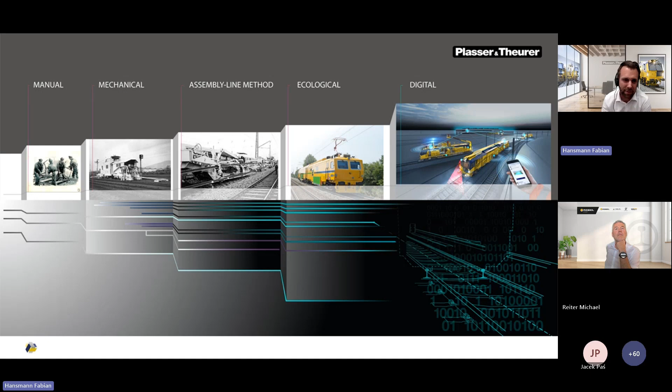What we can see is that we currently have an increasing challenge with the lack of skilled people. This is not really an isolated problem - it's not a problem isolated to one single country. This is a problem we have across the whole railway industry, not only focused on railways, but also for us as manufacturing companies and for planning companies. We can see that the lack of skilled people will have a tremendous impact on how we maintain and operate railway tracks.

This is an example from England, where we can see that only 5% of the workforce will be under 25. The German Federal Railways identified the lack of skilled people as one of the core risks for the business. And the APTA, the Association for Public Transit in the United States, goes even a step further and says that the shortage of skilled people already has a significant effect on their services.

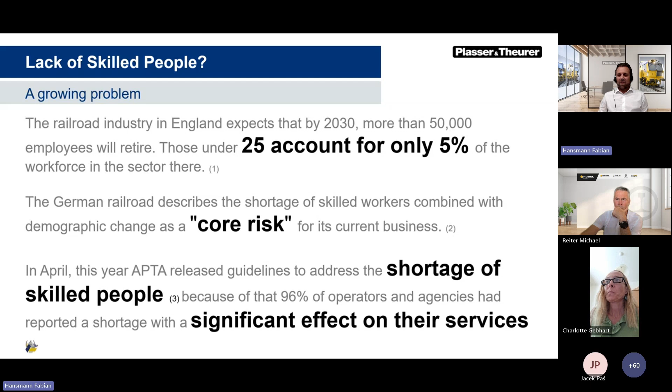So the lack of skilled people is already a big issue as a standalone problem and will raise the challenges that we have. But this issue combined with increasing demand for more capacity on existing infrastructure, running more trains on existing infrastructure, is really a terrible combination because we want more trains running with fewer people. And this really opens the doors for introducing digitalization into the system.

This is nothing new for the system, that is what I have to say. The railway system has used digital tools from the beginning, like for signaling or also for controlling and monitoring maintenance of way equipment.

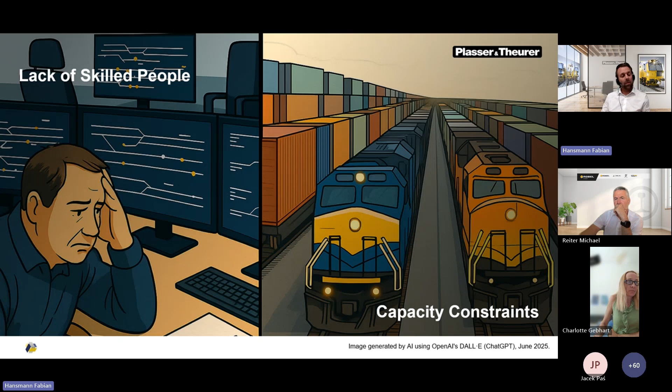But it is a challenge. For instance, the Austrian Federal Railway clearly states that they want to double their capacity by 2040. So we have to run more trains on the existing infrastructure with less people. That is exactly where we see potential for maintenance of way equipment to support or help the system achieve this goal.

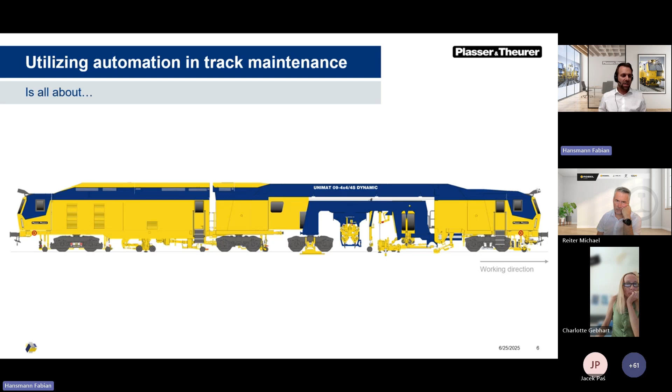And of course, if we now want to talk about how we can automate track maintenance, everybody would assume we have to talk about big yellow machines. But we want to take a different approach here, because one thing is clear: you can only get high performance out of a high performance machine if a lot of different aspects are working together.

So we have to switch a little bit to an end-to-end process when it comes to track maintenance - not only focusing on the track maintenance machine, but on a process that combines pre-measurement, work preparation, execution, and documentation. That is a really important aspect here.

Giving you an example: a high-performance tamping machine will not be able to achieve high performance results or high quality if it does not have the surveying information from a pre-measurement run. A high-performance tamping machine cannot achieve high performance if there is not sufficient ballast loaded, located, or stored in the position where we have to maintain the track.

What I wanted to say here is that when we talk about track construction or track maintenance, it's not only about the big yellow machines. There are so many different aspects that we have to consider, and we can only optimize the efficiency of track maintenance if we optimize the process itself.

So let us start with the pre-measurement. When we talk about pre-measurement, we talk about condition monitoring. That is nothing really new for railways all over the world - they are using measurement signals or devices on measurement platforms or recording cars, like here, the EM100 VT.

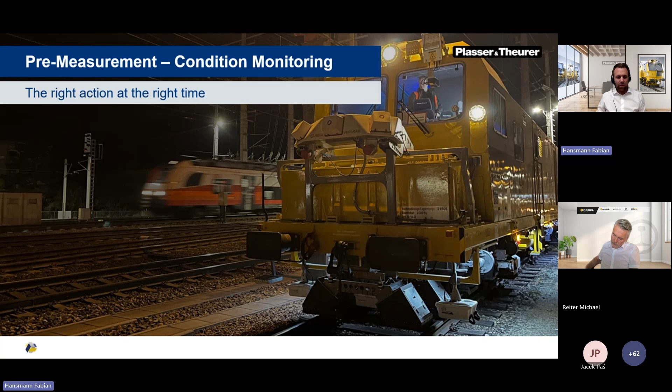So the question is, how can we actually make the data smarter? How can we use the existing information in a better way to get more out of it? That is really crucial, because usually we use recording cars that detect or measure different signals - we store them, observe them, analyze them. But the issue is, if we have a lack of skilled people, we have to go a step further.

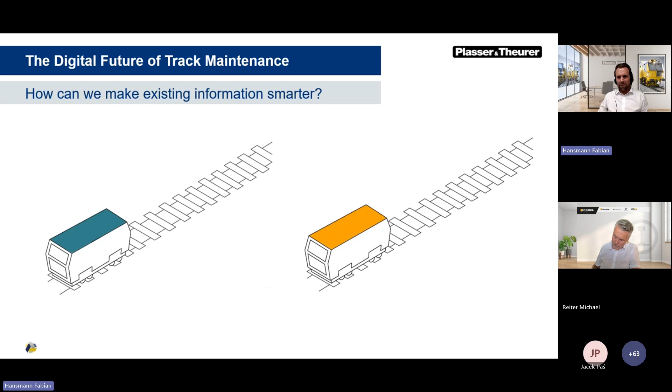So we have to actually use the same recording car, analyze the data - but analyzing the data is not the last step. We have to create information out of the data. So making information smarter means, for me, transforming data into information, and then information into knowledge.

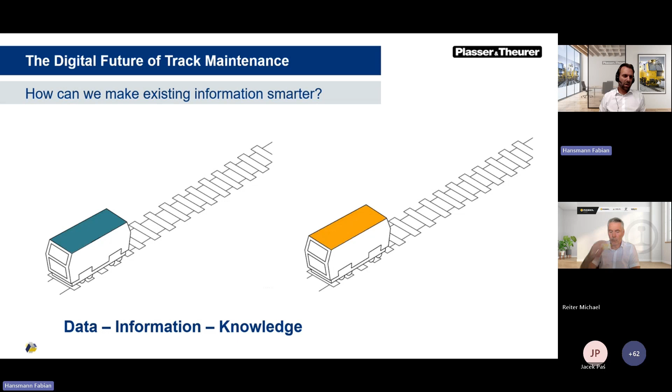That is exactly what we need when we consider that we have a lack of skilled people, because only if we can create maintenance actions directly out of the data will it make planning easier, also for less experienced operators. Then, in the final step, we have to connect the different information providers with the executors - connect the recording cars with the tamping machines, with the ballast plows, with the regulators, so to say.

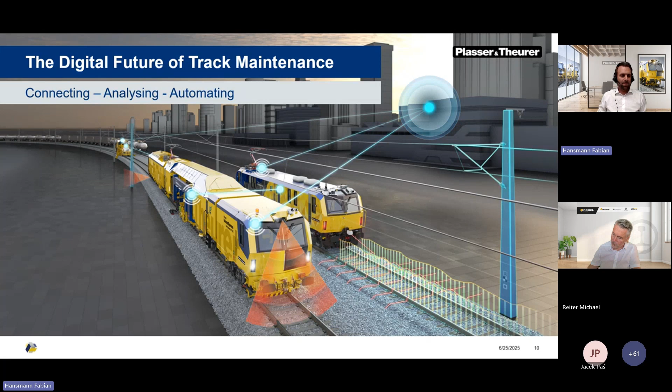So the future of track maintenance, the future of pre-measurement, is not only to transform data into information and information into knowledge. It's also about sharing this knowledge with the different stakeholders of the system - with the tamping machine operators directly, not with a flash drive, not with a USB stick. It's more about connecting different machines to each other to optimize the interaction between the different maintenance of way equipment.

So once we have identified the location where we want to do some maintenance action, we have to work on the work preparation - we have to unload ballast, identify what components are worn out, what we have to do. How do we do that currently? We still walk the tracks from time to time to identify what we should do.

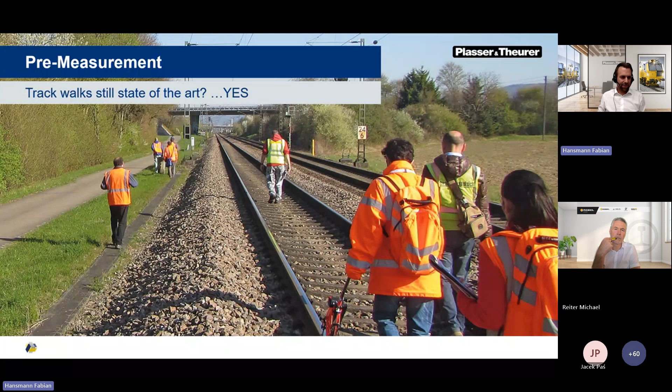And the question is, can we use the different information from different measurement signals by combining and connecting them, creating a digital twin? And the answer is yes, we can.

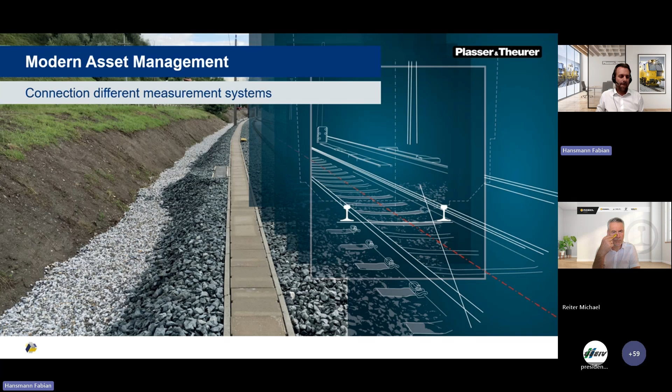I want to give you an example from Germany, where we had a renewal project between Hanover and Würzburg, over 523 track kilometers. There's a regulation that we have to walk the track, or at least analyze the track condition before a renewal action. In that specific case, walking the track would last almost 60 days.

This is absolutely impossible in a time where we have a lack of skilled people, but also a lack of capacity, where we want to increase capacity, to put it differently. So we can, of course, use a digital twin.

That is exactly what we did, in collaboration with our project partners. We were able to reduce the 60 days of track inspection down to 10% of the track possession, running a modern recording car over the track, combining all the different measurement signals into a so-called digital twin, which can now be analyzed in the office in a much friendlier, more work-friendly environment, but also in a safer working environment. That is the second very important aspect here.

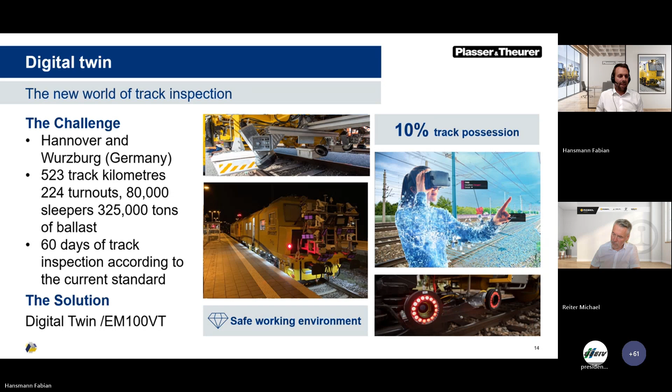We can run a recording car at 120 or 100 kilometers per hour, combine the information, and then analyze it in the office, where we can work with experts, but also with operators who are probably not so experienced. So once we have identified where we want to do a work execution, and how we want to do it, the question is: what do I need to do?

Now the question is, we have to execute the work. I want to show an example of how such a work execution can work in a more optimized way.

I want to give you an example for really system-critical components, like a crossing. A crossing is really critical for a railway. It's not only about changing from one line to another, but any failure in a crossing would have a drastic impact on the whole system.

So the question is, looking at such a universal tamping machine, can we support that machine, or can we train a track maintenance machine so it's doing the work on its own, or at least monitored by not 3 operators anymore, but just 1 operator?

That was the goal of a research project we started almost 10 years ago, looking into how we can start a journey towards a fully automated tamping machine. The main goal was to reduce the head count on the machine, tackling the challenge that sometimes we don't have the required crews to operate tamping machines. So it's not so much about a lack of tamping machines in the market, it's more a lack of operators to actually operate them properly.

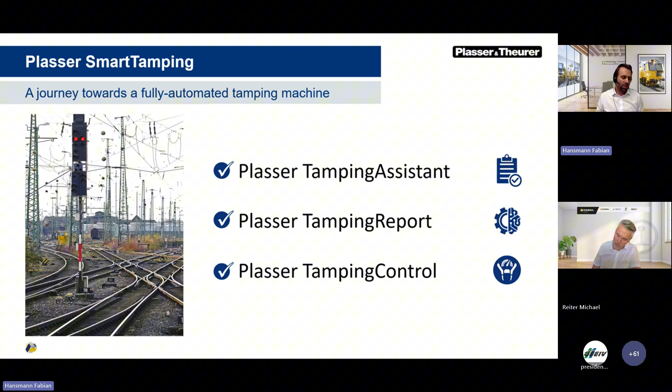So the main goal was, how can we help beginners, inexperienced operators, with operating such a machine, but also how can we reduce the head count on such machines? So we are using more or less the tools we also saw during the creation of the digital twin, during the pre-measurement runs, to record the data.

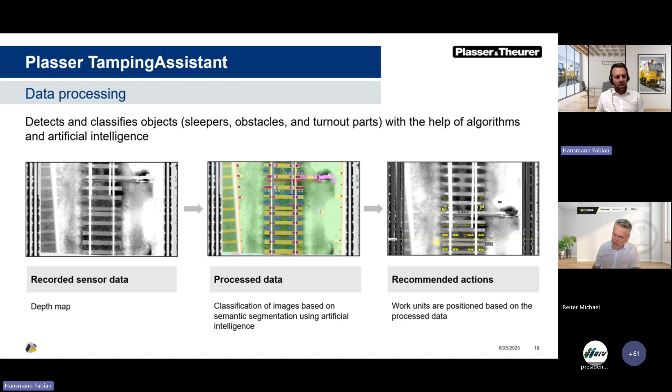We more or less built a digital twin on the tamping machine. We process the data, and based on the identification of the different components, the segmentation of the data, we identify or recommend certain actions to the operators. So, how it works...

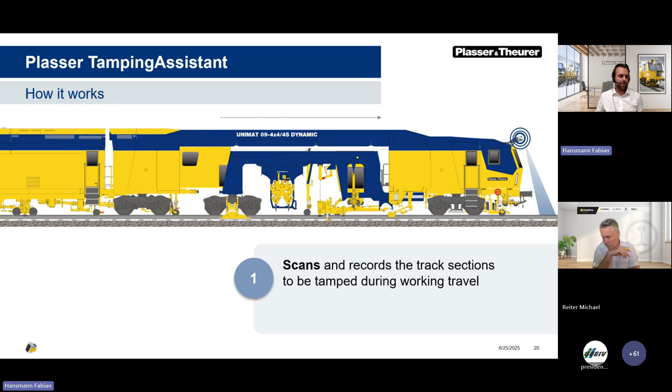So in front of the machine, we have different measurement devices that scan and record the track sections that should be tamped. After the scanning, the onboard computer classifies the obstacles. The computer does that on its own based on up to a 6-month learning curve. So the computer segments the different pictures and identifies, okay, this is a tie, this is a sleeper, this is a cable, and so on. It identifies the different components that usually appear during a turnout.

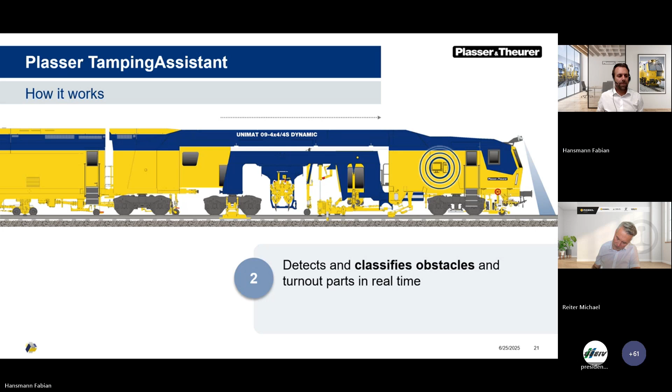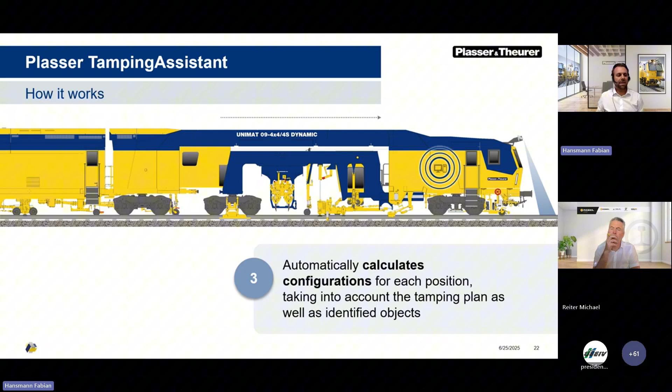And based on the classification of the different obstacles, the computer automatically calculates the configuration of the different working tools. So it identifies the obstacles, it identifies the ballast pad, it identifies different components, and then calculates based on that and existing tamping plans, more or less regulation, how a turnout should be tamped. It clearly gives a proposal to the operator and automatically positions the different working units.

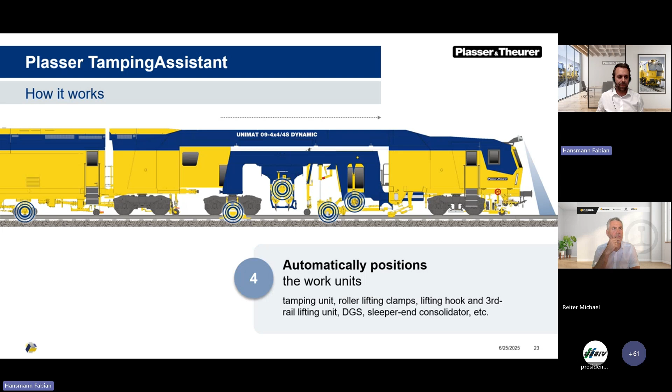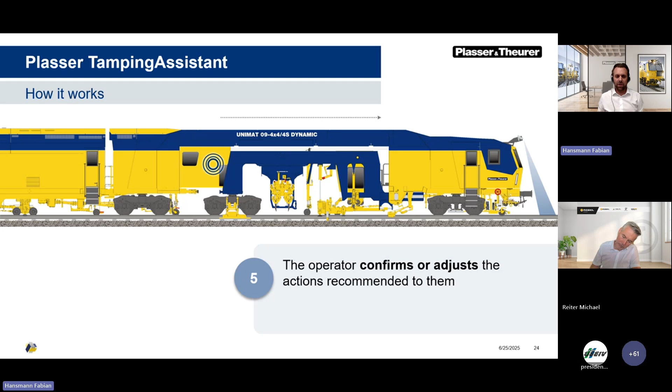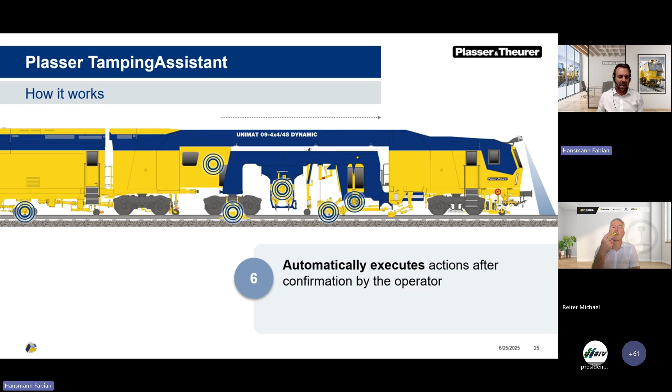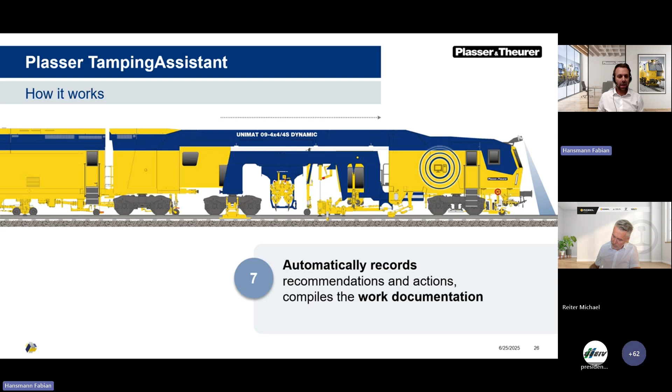So the assistance system identifies the obstacles and then positions the different working units completely automatically on its own. After that, the operator just has to confirm or adjust, depending a little on the situation. Then the working machine automatically executes the different actions, based more or less on the confirmation by the operator. This is still necessary simply based on the regulations of the current railroads. And then in the end, we automatically record the work quality and do the work documentation.

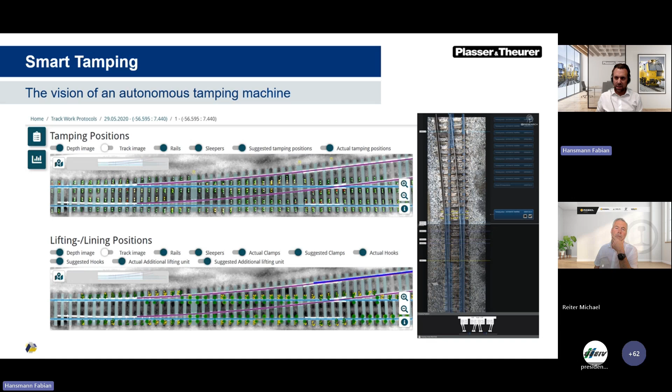It also combines the different information from all the different sensors. It gives you information regarding the ballast condition, information about the lifting values, information for each sleeper - how have you tamped, what quality have you achieved. So it really offers you a transparent documentation of the work you have done so far.

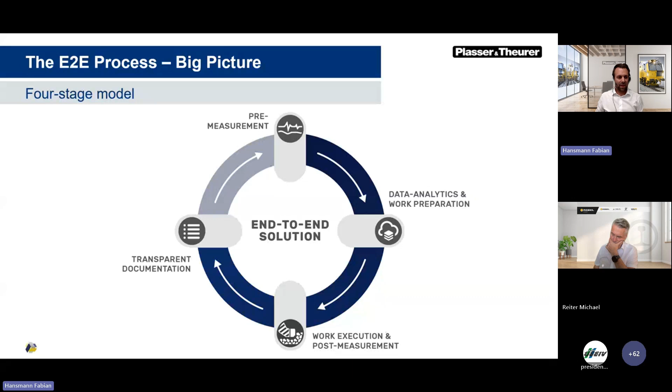And now you can actually combine all the different tools into one tamping machine. Of course, if you do that, you can only measure, for instance, track geometry. So you cannot cover the full range of a track recording car, but aiming on track geometry, you can cover almost everything regarding the track geometry pre-measurement, even on a geodetic surveying level, from the pre-measurement to the documentation, and also the execution for sure.

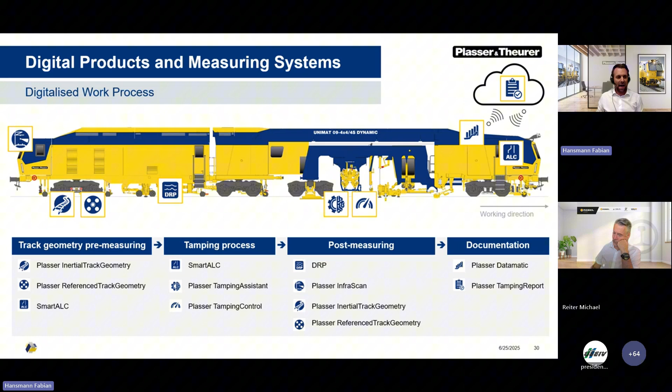So what is really important, what we want you to take away from this presentation: when we talk about challenges, when we talk about higher efficiency in the railway industry, we should not only look at one single machine. We should not only look at one single segment in this end-to-end process. We do not automate only one part of the process - we enhance every movement along the way, because only if each part of the process fits together can we increase the efficiency of track maintenance.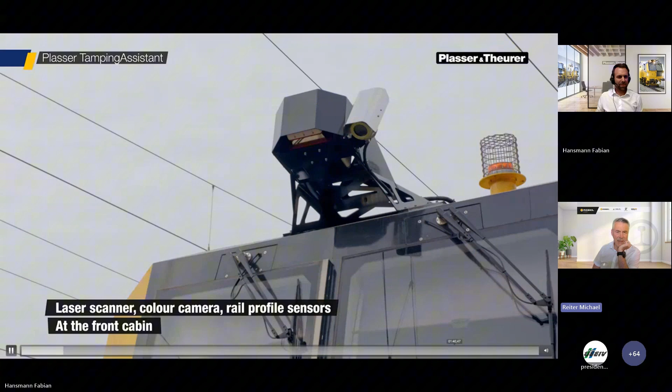With that being said, I will come to the end of my presentation. I would try to show a video, but based on the connection issues that we had, I will just try to show it. Michael, Bobby, you can give me feedback if it runs well. If not, I will stop it and hand over back to the chair. Let me see if it starts in a proper way. Is it working, Michael? It's a bit - let's wait a second. Oh, it's stopping, it's stopping.

Okay, so I'll skip it because I have explained almost everything already in the presentation. It would just be a nice video showing everybody that this is not just an idea - it's a little bit more than an idea, it's reality already. With that being said, I give back to the chair. Thank you.

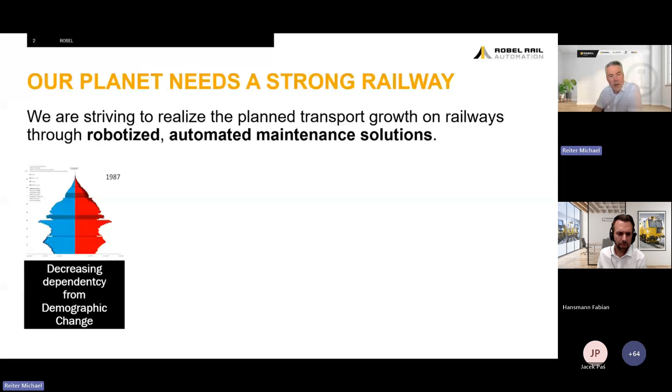So again, also one slide from the feedback that we received so far from our customers and partners. Why are they so interested in having a reliable transport and getting more trains on track? It's really that they need the help of robotization and automated solutions at the end of the day because of the lack of people. And with these solutions, we can contribute to decreasing dependencies on the demographic change. That is really one core topic of all what we are doing and what is driving us.

Another one that is very important to us is the short maintenance windows that we see everywhere. It was 8 hours, it is 4 hours, and as the density of traffic increases, we will see more urban contexts like 2-hour maintenance windows where the job has to be done. And this is already the physical border of work that can be done and achieved in the right quality in 2 hours.

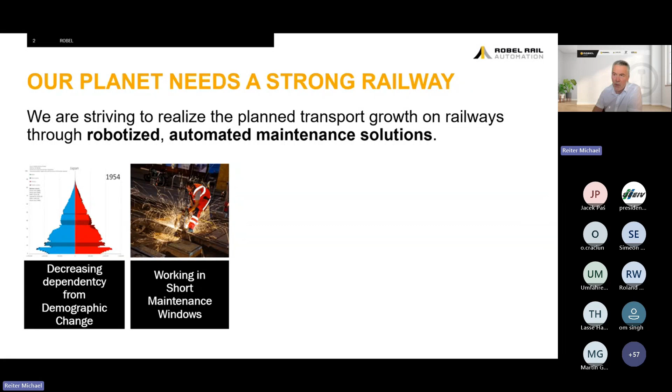Another point mentioned today already was improving the safety of people out on track. So reducing people in the ballast is one paradigm that we'd really like to follow. And also, to have repeatable work done, specifically when it comes to welding, we want to really have this consistent, repeatable process there.

And yes, sure, I think it's not even worth mentioning, but reducing emissions on all sides is demanded by regulations, by laws, and we have to come up with smart solutions that allow us to work reliably on emission-reduced systems. And last but not least, it was mentioned also today that digital integration is key.

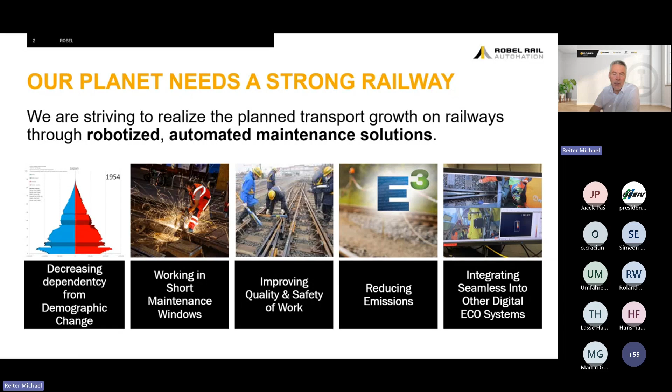So if automation goes hand in hand with digital integration, then I think the value is there. We know what to do, we have the evidence, we do the job, we document it, and at the end of the day it's also a digital twin of the work that we do, not only the track but also the work. And I think that adds value again for all the users. And if it's shared smartly between the infrastructure provider, the construction companies, and the industry, that knowledge will be the benefit of all passengers and all goods transported.

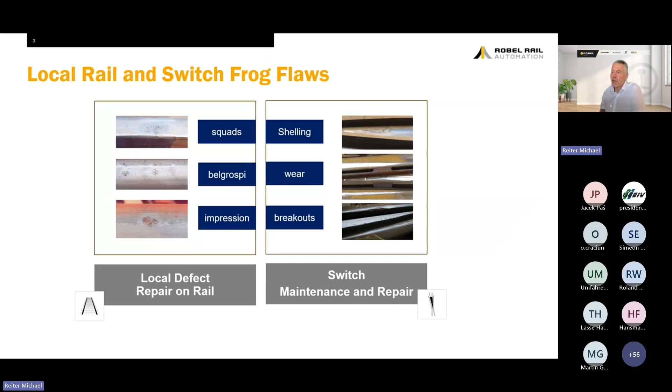Okay, so let's focus a bit more on the technical side. Today I want to talk about two things that we actually automate: the repair of local defects on rail, and the maintenance of switches. And this goes in a sequence, I have to say. Three years ago at the IAF, we first introduced the local defect repair, robotized and fully automated. And the feedback we received was, hey guys, that's nice, but the most critical infrastructure component is the switch. So if you can do the switch, that would be a big benefit. And I want to talk about the two things that we have done here.

If we are talking about automation, also on the tamping unit that we have seen Fabian tackle that point, it's always considered as the end-to-end process. So our vision is: with the press of a button, the machine, in the right position on track, performs the full job, and there is no interaction, no control mechanism from an operator needed. It's more observing and helping with the operational and logistic side of the machine, but not infringing on the process, because this is carried out automatically, always in the same way.

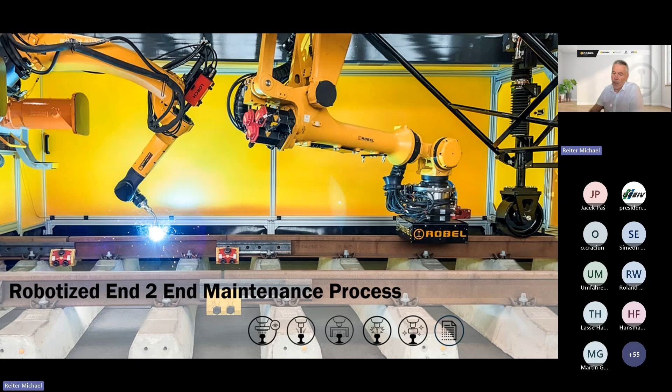Four years ago, we built a technology carrier. We named it, and it turned out that now it's much more than just a technology carrier. Right now it's a machine used to drive homologation efforts on the rail infrastructure, and it's really applied to provide the first services. But I'll come to that a bit later.

In total, the concept we are focusing on is really to have a machine that enables us to focus on process development, to have a really stable maintenance process, and we neglect the machine itself a bit. So we decided to just use what's there: a flat wagon, put containers on top of it, fill the containers with stuff. One is filled with the automation aspect, with the robots. The other is filled with the energy supply and also an operator workspace. And then we have a robot frame that is carried out and does the job and performs the work.

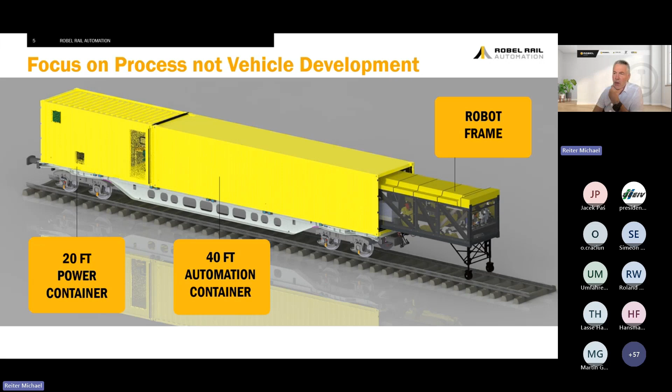So a very simple aspect. Maybe I have to share this thought again. As we are a relatively small company, we have to focus on the core. We just have to do what adds value to our customers. This is why we are not focusing on the machine too much, but on the real world processes that do the maintenance job, and also the software and digital integration. This is our core. We're not inventing stuff, we're reusing stuff.

And this is why we have decided to go with robots. This is, I have to say, one of the most proven technologies you can find today. It's been applied for 20 years in the car industry. They run the full year, 24 hours a day, and therefore this is really a technology with less maintenance and is that reliable and flexible to work with. It was just a perfect platform for us to integrate all the maintenance jobs that have to be done.

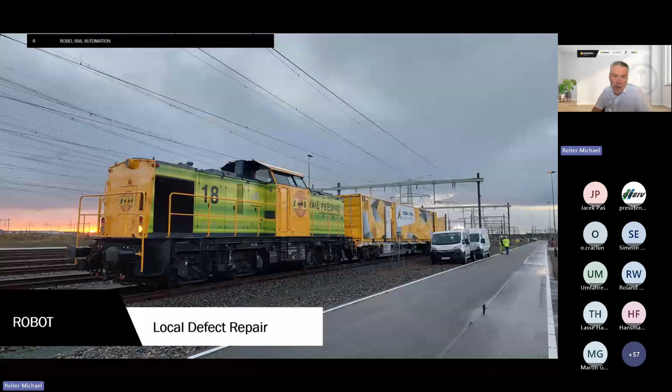Okay, so let's start with the local defect repair. What you can see here is last year in the Netherlands, we were out there with a locomotive, working on a heavily driven track from the Rotterdam harbor to the German border. Our focus was to repair squats, belgrospis, and impressions.

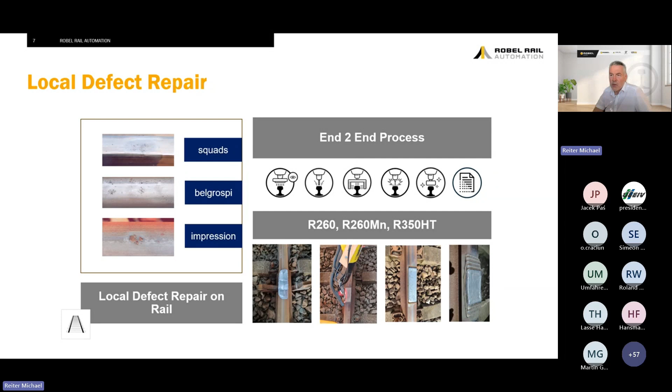First of all, we did all the trials in our facilities in Freilassing. And as they were approved by DEKRA, we moved out with the system to the infrastructure and did the homologation work there. The end-to-end process in this case was carried out on our R260MN material, so it meant we had to preheat the material. From measuring the geometry, milling the material out, welding it up, reprofiling it, and supporting all the processes with measurement was the core process we carried out there.

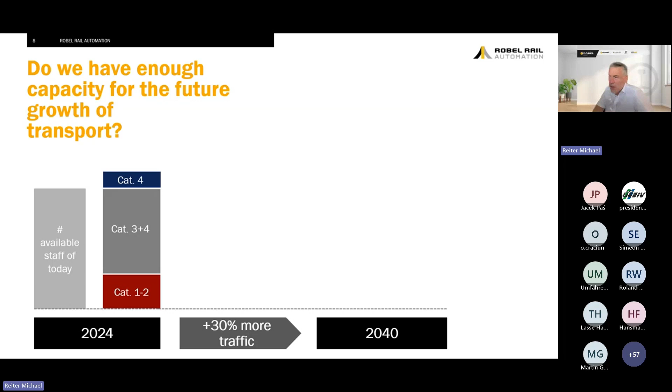Insight that was also touched on by Fabian a bit is really what we heard from ProRail as infrastructure provider. In 2024, if they look into the availability of staff, a certain fraction of ultrasonic defects can be addressed - these are the critical ones with immediate actions and some maintenance work. But category 4, which is preventive maintenance, is already not possible with the available staff today. And as they see traffic rise by 30% in the upcoming years, the work and the defects will increase too. We can assume that staff availability will not grow - it will rather deteriorate a bit.

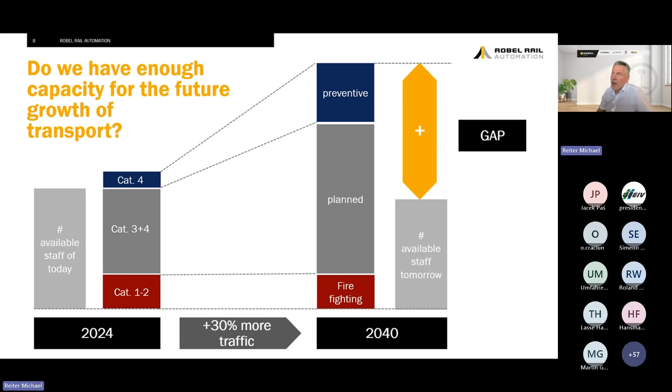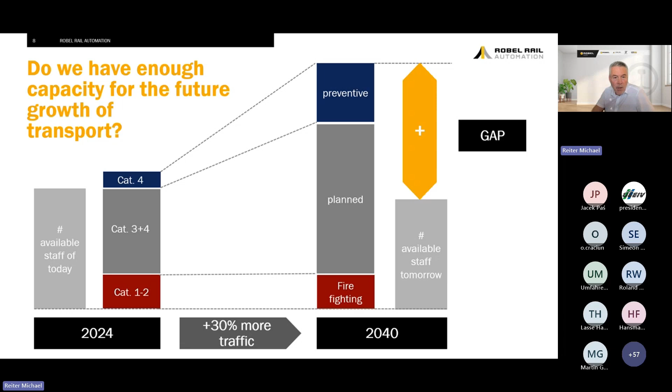And that makes up a big gap that we have to close with machines at the end of the day. And I think all the people here in the room see it. Machines did a great job in the last 30, 40, 50 years helping people perform jobs. And this is exactly what we do on the welding and repair of rail and switches - it's exactly the same.

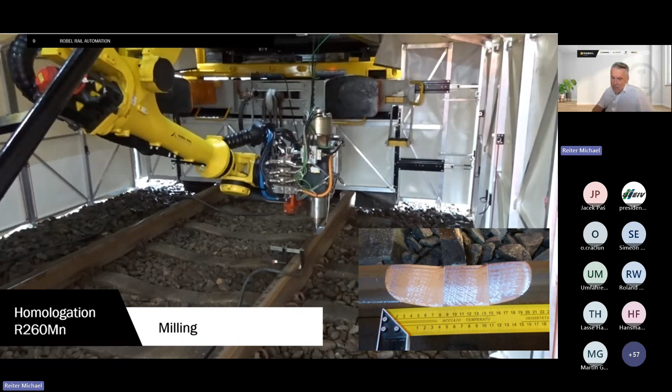Here are some impressions of what we have done in the Netherlands. I hope now the video... oh no, I will skip it as well.

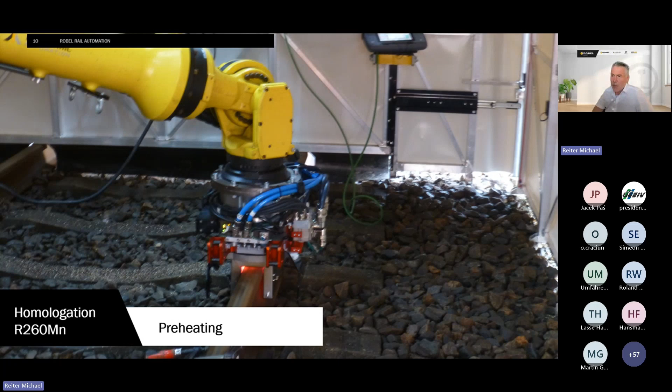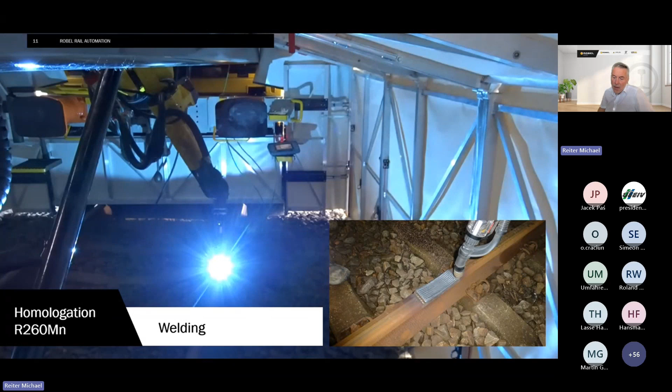You can see the preheating step here. We are using ceramic plates built on the robot, bringing it down to the rail, heated up to 350 degrees Celsius, ideally prepared for the welding process. We weld it up layer by layer. So the homologation in the Netherlands, and from a European standard point of view, there are clear rules you have to hold to - intermediate layer temperatures that have to be fulfilled. And we have built 8 welds there in the infrastructure on this heavily driven track.

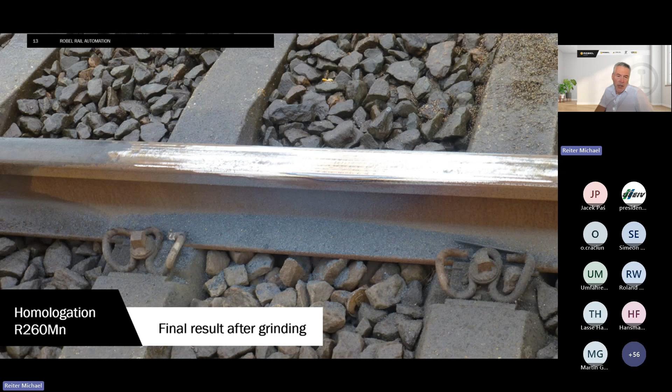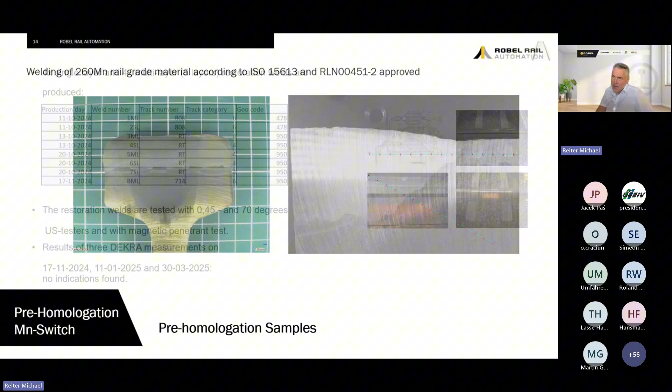They are observed every month by an independent DEKRA employee and checked. In parallel, before we went there, we of course checked it also from the material consistency, the hardness, and all that stuff. And that has worked out nicely since then. So all the welds prepared on the Netherlands infrastructure, on the railheads, are there - they are working, and there are no defects, neither recognizable with ultrasonic or color testing, nor with visual inspection.

Coming back to the feedback on the AIF, yes, the rail is a nice thing, but what's really important is to deal with switch frogs. I want to mention two grades of material: one class based on manganese needs a very cool treatment process, whereas switch frogs made from R350HT material need a high energy welding process. So two completely different welding processes on two completely different materials. We've found a way to deal with both using the same equipment, just with two different processes and two welding materials, and this is what I want to share in the upcoming slides.

The problem we really want to solve is worn switch frogs. As soon as you get wear on the switch frog, the dynamic forces increase, and that hurts every wheel that drives over this already damaged switch frog even more, leading to shelling, wear, and breakouts. These are the defects we are prepared to address on the two materials mentioned.

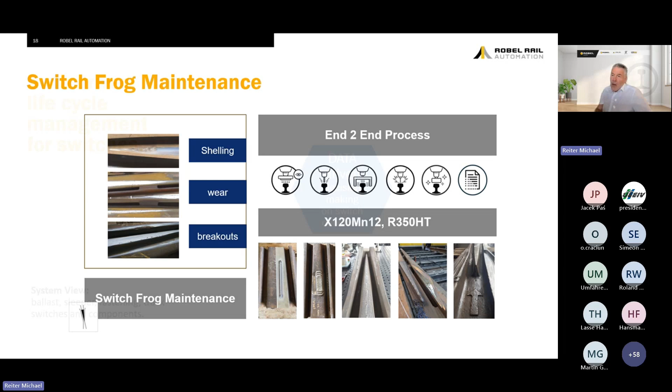Before we go into the welding process, let's look at the life cycle of an installed switch. It all starts with the data from our perspective. The data pool is the decision criteria, the golden book where you derive your actions, and it starts already with the design and manufacturing in the fab. So the lifecycle management has to be supported best with information from the manufacturer of the switch frog, including geometrical information.

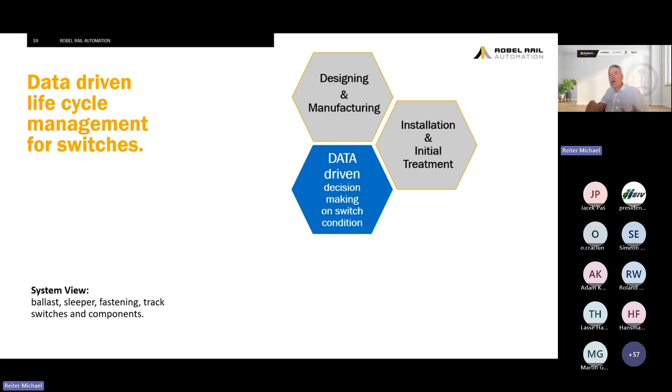Then the switch frog gets installed and the initial treatment is done. Looking at the system of a switch, the ballast, the sleepers, the fastening, the track all play a role. In the ideal world, we look at the system itself so the ballast and ties are in the right position for good integration of the switch frog.

As it's installed, preventive maintenance starts. Grinding or a retamping step keeps the switch frog in the right position to keep the dynamics on the switch frog as low as possible. Let's do this as often as possible, because that helps keep the life cycle of a switch frog long.

And yes, there will be a point in time where planned maintenance or repair has to happen because we're seeing breakouts and the material is already a bit worn. So the maintenance step has to be planned and carried out. And last but not least, this is the thing no machine can deal with, because the team is the best solution for it—it's still the welding team that does the unplanned maintenance. If there's a red alert, a switch frog has a problem, it's the team that goes there and fixes it so the trains can run again soon.

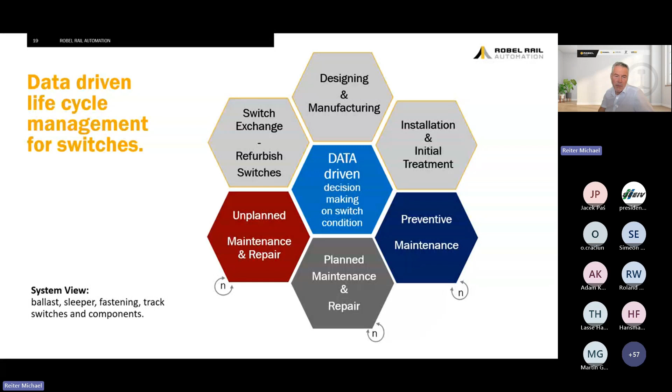Last but not least, it's about the refurbishment of the switch frogs. In terms of reusing material and saving CO2 and resources, it's also a way to refurbish switch frogs on site and reinstall them. This could close the full cycle of the life cycle of a switch.

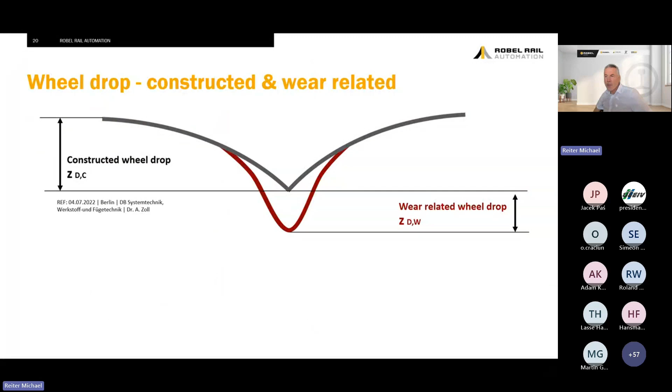The constructed and worn wheel drop—I think I already made the point. Let's keep the constructed wheel drop as long as possible in the original shape and keep wear at a low level using preventive maintenance, planned maintenance, and unplanned maintenance as well.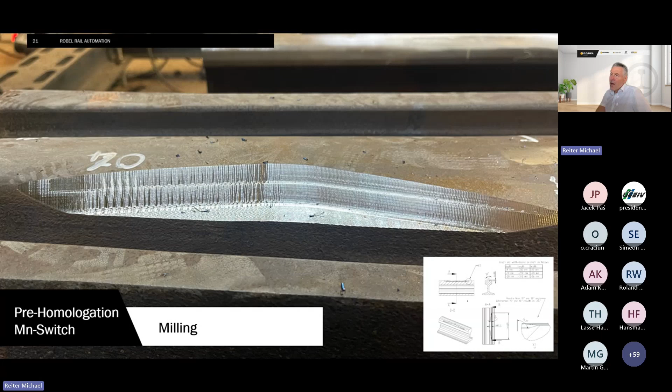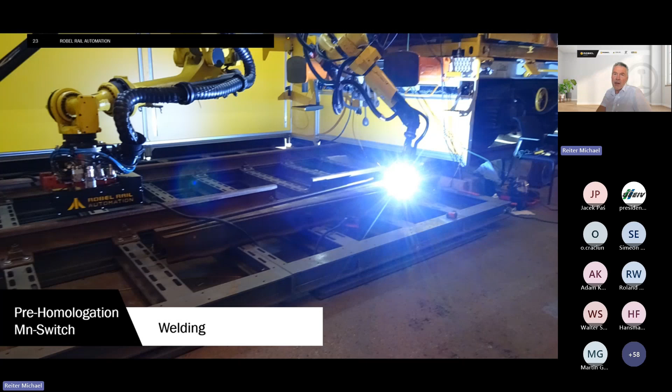Then as a next step, we put the switch frogs again into the lab environment, into the fab, and started with the welding process. Here again, I have to mention it's a cold welding process, so we make sure to stay under 250 degrees Celsius during welding, done layer by layer. This slide shows a bit of the technical magic we're applying.

Maybe some of you have a good understanding of a 3D printer—it's the same thing we're doing here. We cut out the geometry, measure it so we know exactly the missing material, and that's then subtracted by an algorithm into layers, and these layers are built up with a welder. This is simply what we're doing here, but it took us quite some investigation to come up with a stable process that works on all the different geometries.

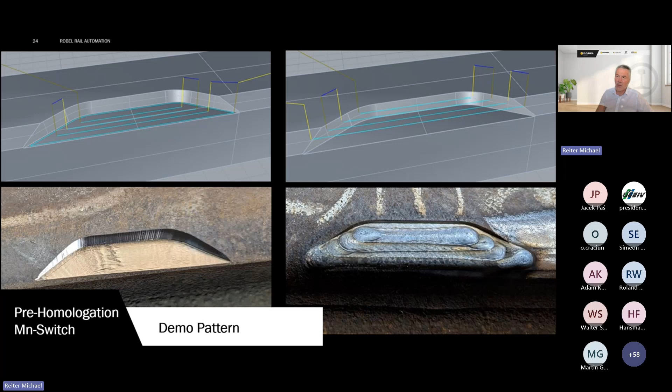Then the weld is reprofiled. Currently, we are in the step to do it with milling. As a next step, we will also do the reprofiling with a finishing step using grinding, but this is still under investigation and development. The milling, however, is already implemented.

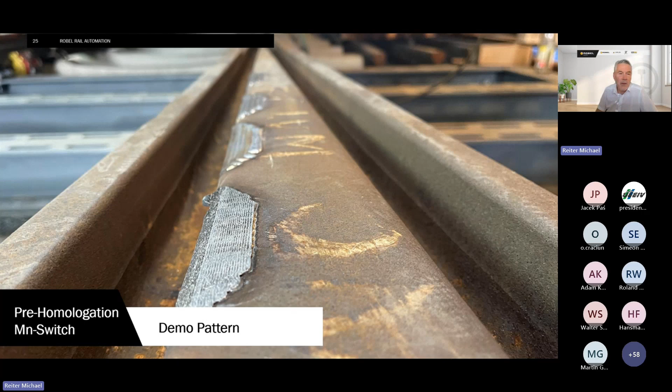Material analytics show really nice results. Hardness level is there, and also no inclusions are in the material. This is through the first observation of an independent institute, and we're still working on the material and the tests.

Another story: besides the manganese material, R350 HT is the second grade of material on switches. Again, same as with the 260 Mn material, it needs preheating. With ceramic plates, we see some limitations because we have to reach the geometry of a switch frog, and therefore we decided to utilize a heating process, like you know it from the kitchen.

The inductive heating induces the temperature within the material, and it's extremely fast because we are able to convey the energy without losses. The results we have achieved here are really amazing: 250 degrees within 15 minutes. It's a very fast time to get the material heated through. So the difference is that it's not just the surface that's hot, it's really heated through the whole material, and that helps the welding process extremely.

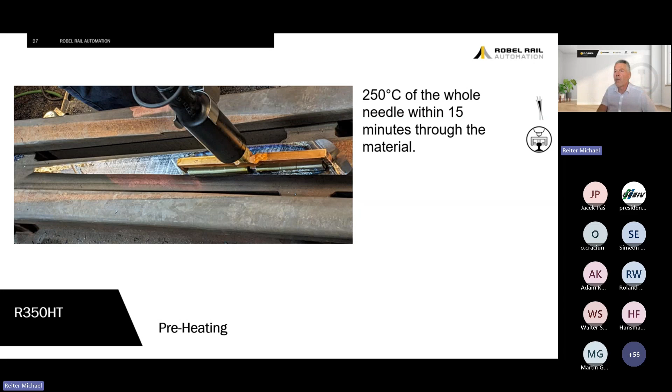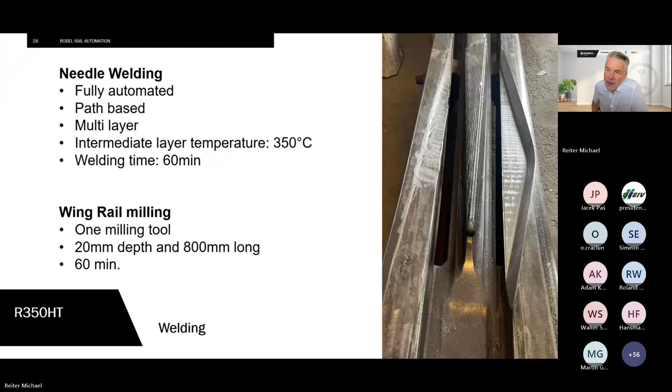Here are some examples, 350 HT. That is really a big cutout of a wing rail on the right-hand side, and the needle is welded up 2 centimeters deep and a length of 800 millimeters. We can say that this needle we have already cut. The cross sections of this needle look pretty nice, the hardness is there, and the material consistency is there. This is really on a promising path forward.

Same with the wing welding on the 350 HT. And that leads a bit into the thought process now: if we weld the needle and the wing, we have to finally achieve the right geometry for a low dynamic wheel transfer, and this is still the topic we have to solve and cover.

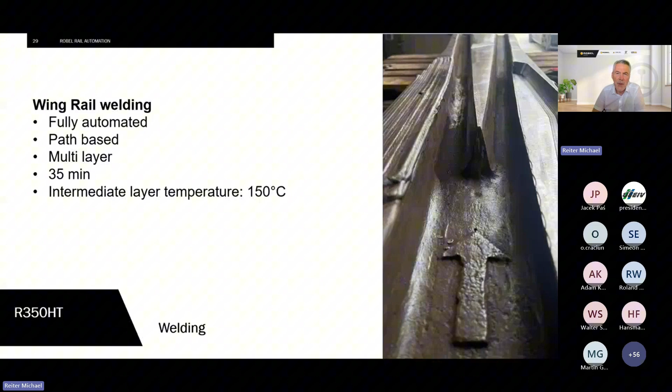At the end of the day, the perfect wheel transfer geometry has to be achieved. And therefore, again, it needs strong collaboration between infrastructure providers, construction companies, and the industry, because it's not easy to name the ideal wheel transfer geometry. So we need to put our heads together and define it.

Some more examples - this is more on the preventative maintenance side. It's not 2 centimeters deep of mill-outs, it's just building up 1 or 2 welding layers to preventively maintain the switch frogs and just do a final finishing in grinding, and have a good switch frog after the repair again.

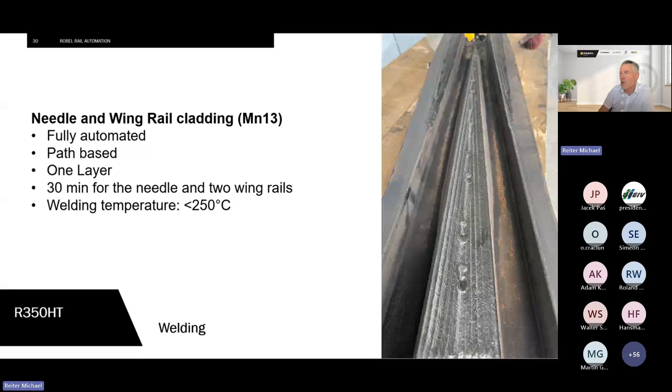The digital integration, as mentioned, right now is a sophisticated workplace. We are measuring all the vibrations, and we are storing all the vibrations, all the geometrical information, and the video information during the treatment. Yes, it will shrink step by step. At the end of the day, there will be just one monitor with the press of a button, and the whole process is carried out. All the information shown here is just background information that we can pull up again if needed, and it can be added to the life cycle history of a switch frog that was maintained.

A last thing to mention here is also the machine itself, the processes, the location, and the status. All of that is tracked, and it builds the history of the digital twin of the track, but also of the maintenance process.

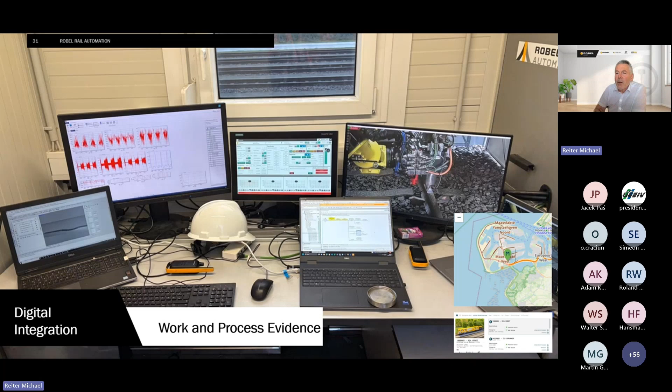Good, what's next? Three things. Right now, and even more after the IAF, we are on the trip of homologation. We have now several requests from infrastructure providers to come over with the machine and perform the homologation of the welding processes. The challenge we see is that on one hand we have already existing homologation results, and we don't want to reinvent the wheel again, but maybe just focus on the differences in the various countries in terms of homologation, so we don't have to do it all over again, but benefit and copy with pride what already exists.

It's a bit of a call - maybe there are interested people here in the group as well who have some feedback on it, but it will really help speed up bringing such a technology into the market.

The second one I wanted to share is the switch frog process development, but also the services that we provide. And last but not least, the next generation of machine.

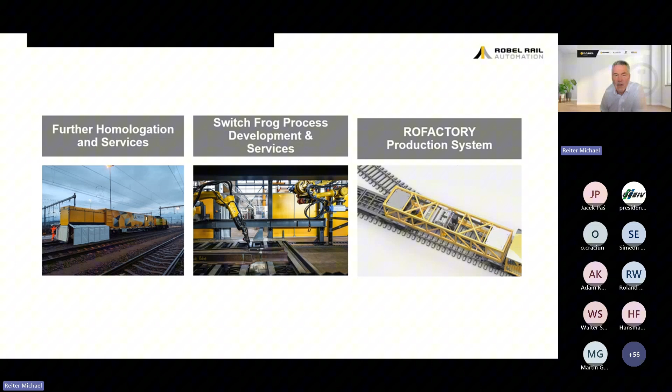So the homologation, as mentioned, it started in the Netherlands and it's now moving out into other European countries. We're right now in the negotiation phases to get the next homologations out in the European infrastructure. And one of the core success criteria, I have to say it over and over again, is collaboration. Having construction companies, the infrastructure provider and the industry sitting on the table, really trustful sharing of what's needed and how the next steps can be done together, is the key to success. Nobody can win the race alone. We can just do this together.

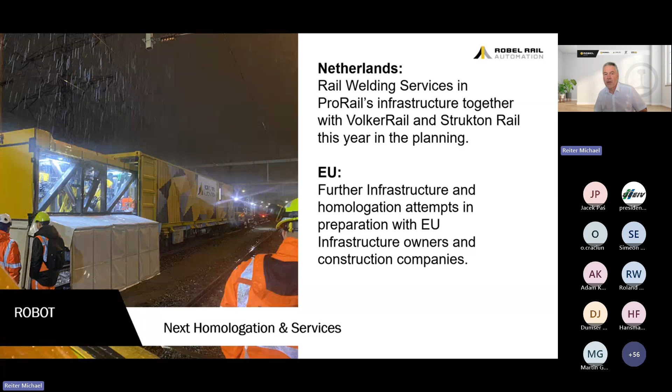The in-house switch services, this is what we're starting up right now. It's easy to imagine if you can do it on track, why not do the switch maintenance also on site? So we have built now a switch maintenance center on site in Freilassing, and this is already in the test phase to homologate the switch frog repair for manganese switch frogs right now, but we would be open also to do this for R350 HT material.

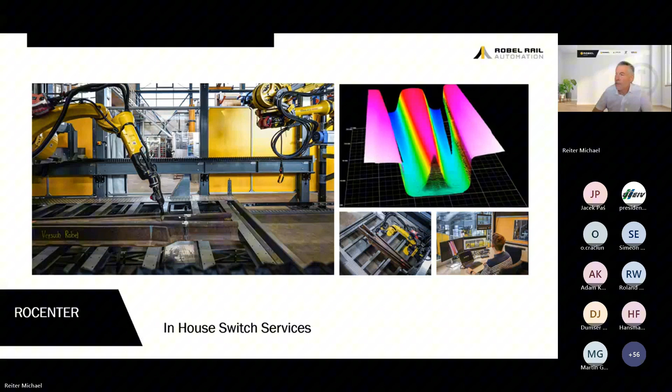And that is my last slide for today, because I also skipped the video that I have prepared here. The next generation of machine considers two major aspects that we have learned over the last 3 years. With the current technology carrier and prototype we have in our hands, we are able to deal with an infrastructure length of 1.5 meter. And for specific switch frogs and also for other maintenance work besides welding, it is demanded to reach out a bit more in length. Therefore, we have decided to open up a 7-meter maintenance area to the track.

That changed the system a bit. So right now you can see here 2 flat wagons that are separated on the site construction, and the 2 robots that now have the capability to move over 7 meters of length. The welding robot and also the handling robot are able to move over the maintenance area, and therefore we are able to cover 7 meters.

The second big aspect that we have implemented here is we are more modular than ever before. The boxes you can see on top here are tool boxes or spare part boxes, even robot boxes, that can be changed on site and extend the functionality of the system. So the good message here is if we go for a first investment for a welding robot, as shown here, it is open for the future also to deal with other maintenance tasks just by substituting the toolboxes and the one or the other robot to perform additional tasks with the system.

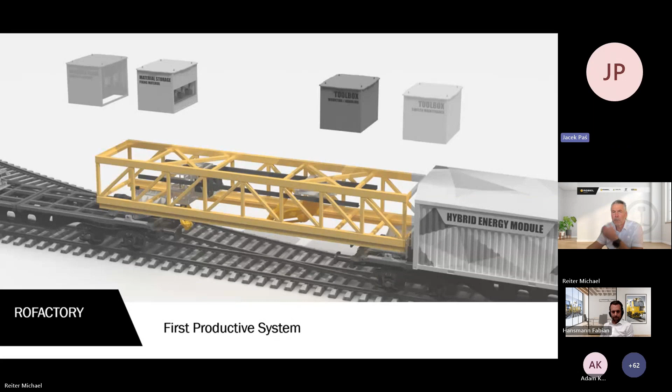Okay Michael, thank you very much for your presentation. New technology related with preventive and corrective, and as you mentioned, planned maintenance, which will focus on improving parameters like reliability, availability, and maintainability, and consequently reduce whole life cycle costs, are very important for everyone, and requires constant improving. Now I will try to open my camera and open the panel discussion. Yes, I'm here, hello once again.

Have we got some questions for presenters? Maybe somebody wants to share their knowledge and experience in track maintenance? Okay gentlemen, but maybe the first question will go from my side.

I don't know if Robel or Plasser calculate the RAMS parameters, like reliability, availability, and maintainability, based on your new approach to track maintenance. Has somebody in the company tried to calculate the parameters about availability, how you improve the parameters of availability of track operation, using for example the modern approach of the modern machine to track maintenance? I think it's a very interesting question here, and I would try to answer it in this way.